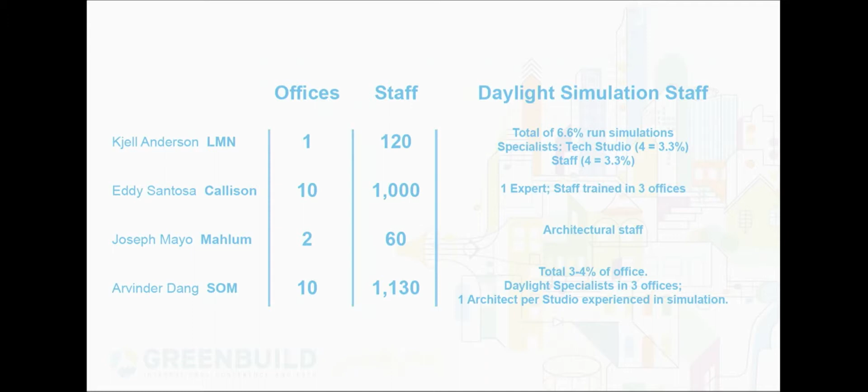So question, how many of you have daylight simulation programs within your firms? Unscientific, about half of you. How many of you actually click the buttons and run the simulations yourselves? So a few less, maybe 30%. That's really good. It's more than I expected.

So here's a quick snapshot of the 4 firms that we have. You've probably read it by now. We're trying to provide you a good cross-section of how architecture firms have used daylighting simulation within practice. So we have firms from 60 to over 1,000. Some of us use specialists, some of us just use generalists performing the simulations. But all of us use it to make decisions.

So my name is Kjell Anderson. I'm an architect at LMN Architects in Seattle. I'm also an author of Design Energy Simulation for Architects, which came out earlier this year. I've personally found it very freeing to do daylight and other types of simulations.

Instead of guessing that a space you're working on might have the right amount of light, not too little, not too much glare, you can actually play with it ahead of time and figure out exactly what, make sure that you're getting exactly what you want out of it. Play, as with children, leads to an intuitive understanding of daylight. So actually clicking the buttons helps that learning.

At LMN, we work on a variety of complex project types: performing arts, convention centers like we're in, higher ed, sports, and mixed use. A lot of our projects are urban, and so rules of thumb don't exactly apply to all of our projects. Since rules of thumb don't apply, simulation is even more important in order to vet kind of more unusual designs, shading, skylights, etc., that are common to complex building types.

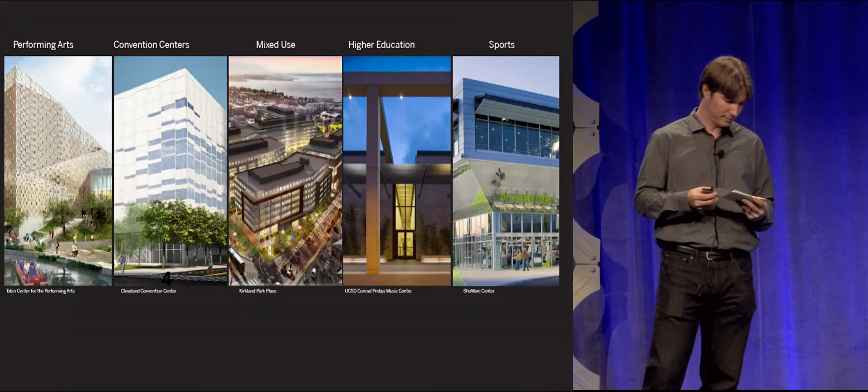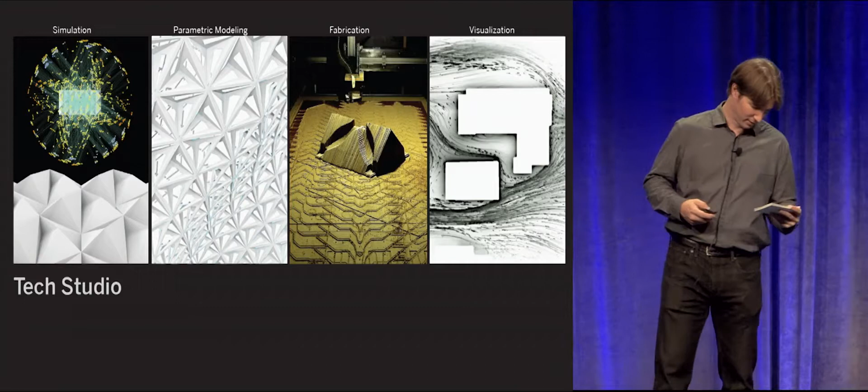With 120 plus employees, we have 4 people dedicated to technology. They're not IT people, they do other types of things. One of the things they do, they create complex parametric designs, and they work with costing exercises and fabricators to make sure that they're realized. They also write scripts to translate between Revit, Rhino, and other software. They operate our quadricopter, which is kind of cool. And they assist with daylight simulations and other types of simulations.

So as architects approach daylight simulation as an in-house entity, we have a lot more power than when consultants perform the daylight simulation. And the reason is we make the decisions, we make a lot of the decisions. If we come up with a better idea by doing a daylight simulation, we can implement it right away. We can talk to the design team 5 minutes later and have it as part of the design. So this is a powerful part of having it in-house.

So look around you. Isn't it ironic to talk about daylighting in a space that has no windows or skylights? Most convention centers were built and designed in an era where meeting planners wanted black boxes so you could do cool presentations like this. So I'll tell you a quick story about a convention center, one of the ones that we've gotten some daylight into. This is an exhibit hall in Spokane.

About 10 years ago, we noticed there was a gorgeous view of a river here and suggested putting in a window. The client said they didn't know if we should, since most exhibitors want dark spaces and we'd probably have to cover it up most of the time. What ended up happening when we talked to them a few years later was exhibitors wanted to be near it, and since attendees wanted to be near it too, exhibitors really, really wanted to be near it. So when we did an addition last year, we put in a full wall of glazing, and they loved it—or they will love it when it's done.

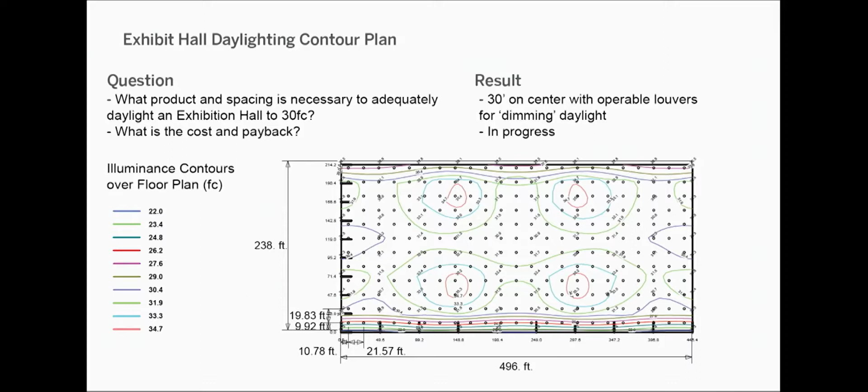So what we're working on for this project in Columbus, currently in DD, is a tubular skylight system over 100,000 square feet of an exhibit addition that would provide 30-foot candles and allow us to turn off the lights for the majority of the time. Even though we can black them out, we figure 70% of the time we'll be able to use the daylight and turn off a majority of the lighting systems.

So this is kind of the next evolution in that. This is a floor plan analysis showing contour lines that the manufacturer did for us. But since we do daylight analysis in-house, we were able to vet this and work with them so that we understand what these skylight devices are doing.

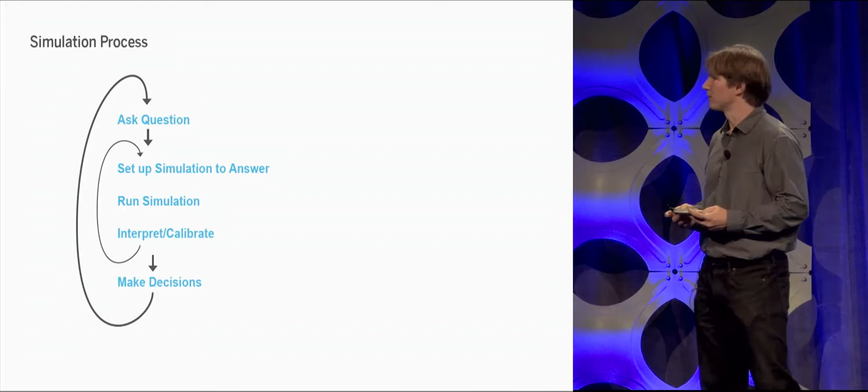As we design projects, we think about what constitutes success for each space, and it's very different for every space. Even within a school building, there might be 10 types of spaces that each have different daylighting requirements. So we think about the question—the question is the most important thing in my mind. Can you turn off or dim electric lights throughout the space? Is glare avoidance critical? What glare control measures are even in the budget? And are there minimum or maximum illuminance levels?

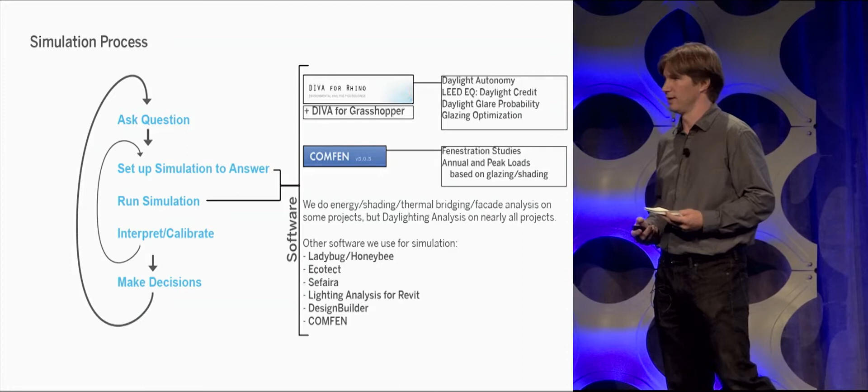Once you have the question, you can get into the software and infrastructure required for firms to start a daylighting program. We primarily use DIVA for daylighting currently. We're a Rhino and Revit-based firm, so Diva provides all the tools we need—it actually combines a lot of the tools we're already using into one package. We also use COMFEN, and Tech Studio is always testing new software and new techniques.

So I'm going to talk about a few case studies.

For this project, we had 8 hours to compare 4 massing schemes so we could present them to a client. It was a competition, and we didn't want to spend a lot of time on it, but we wanted to quantify performance to some degree.

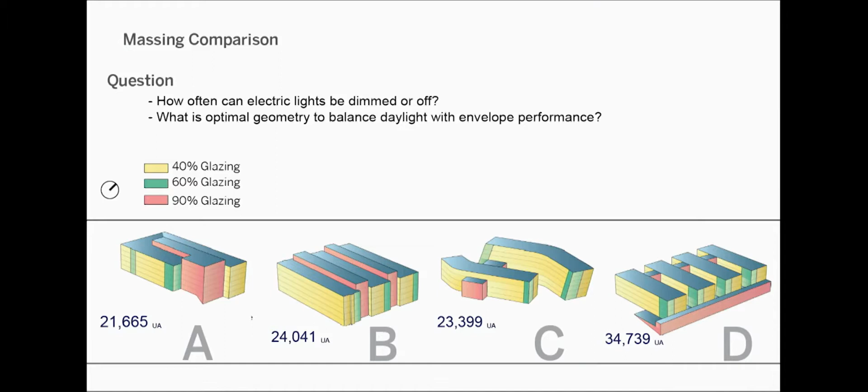So we chose 3 metrics to compare these office massing layouts. The colors refer to the glazing percentage on each facade, based on a really conceptual design. We chose a UA value, which is basically the U value of all assemblies multiplied by the area, then summed. That gives you a basic idea of what cooling and heating loads might be in the space, especially heating loads since it's near Seattle.

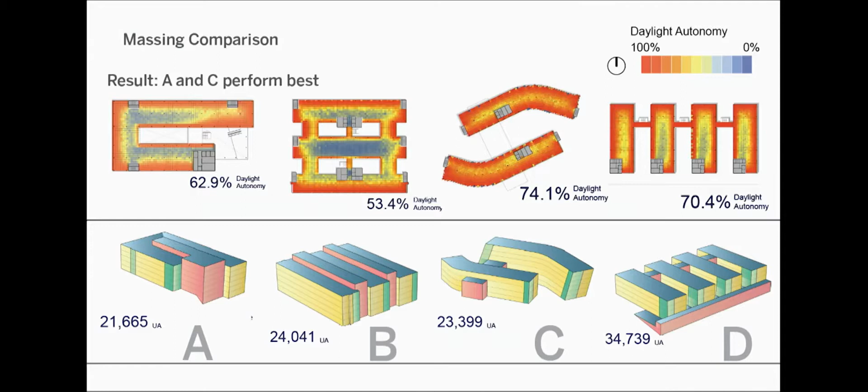We did peak load analysis using ComFen, and then we also did daylighting analysis using spatial daylight autonomy. Spatial daylight autonomy returns the percentage of each floor plate that is adequately daylit—in this case 25-foot candles—during the whole year. The first 2 metrics balance the third. If you just did daylighting, you'd probably end up with a fully glazed building, and spatial daylight autonomy would tell you that you've got a perfect building. But in fact, with 100% glazing, you're going to pay penalties in terms of heating and cooling that space. That's why we threw in the first 2 metrics to balance this daylighting.

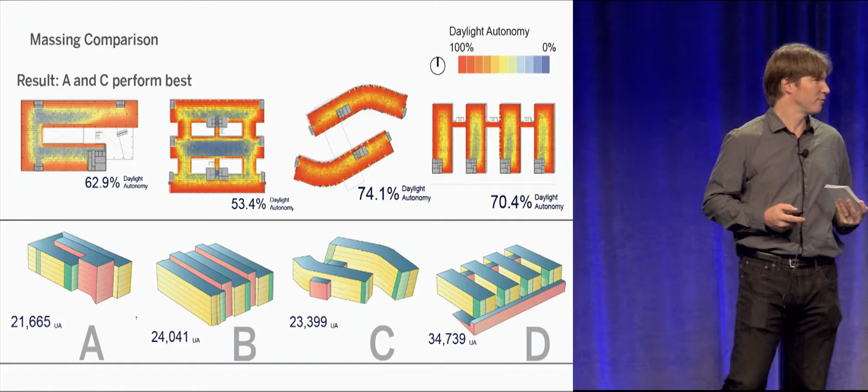So we expected option A to be the clear winner—we designed it to be such. We thought with a daylight atrium, we could get natural ventilation in there, and we're limiting the glazing on the entire rest of the building because of that. But when you look at the numbers, C actually has a better daylighting autonomy, and it has a fairly decent UA value, so we tried to reconcile this.

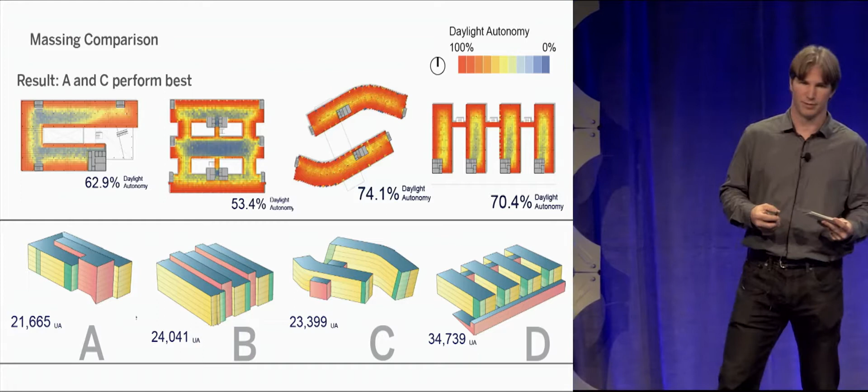The decision is complicated by the fact that the atrium in A is a semi-heated space, and in 4 hours you're not going to be able to model that and compare all the possibilities. But this study basically narrowed it down from 4 options to 2 options, and we were able to proceed from there—that was the only thing we asked of that particular study.

That one looked at illuminance at what's called the work plane, 30 inches above the ground. If you've done daylight simulation, you know that.

While the last example looked at those, most people perceive visual balance within a space based on vertical surfaces. You go into your favorite coffee shop, you've got one wall of glazing, and on the opposite wall you typically have a bright colored wall with electric light flooding on there so you have visual balance side to side. On this 4-story atrium, we have a single wall of glazing and we're trying to do approximately the same thing. The question we asked was how much daylight do we need to provide to light up the balcony rails on the opposite side so we don't have too much visual contrast between them.

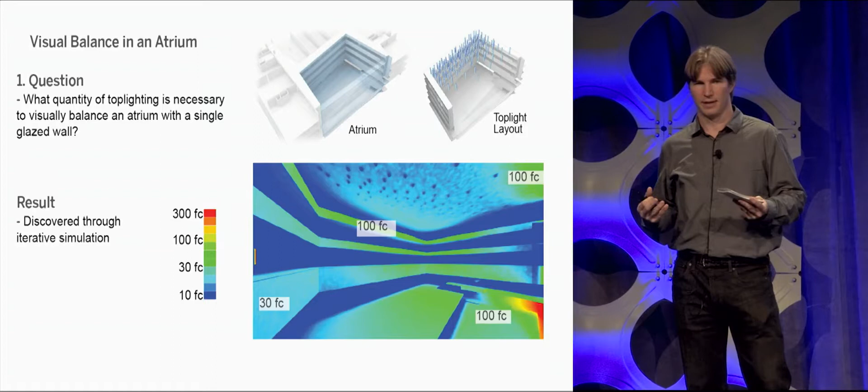30-to-1 is a ratio that can be used to approximate visual balance within a space. So if it's about 1,000-foot candles just inside the window, and about 30 to 50-foot candles of illuminance on the balcony railings, we would achieve success, and that's about what we did. So we didn't have a quantifiable answer, we had an answer where we achieved a certain amount of visual balance that we were looking for.

It's important to calibrate any of your daylighting simulations to something you understand and something you know. When we did an office remodel last year, we had the amazing opportunity to go out with light meters every day in our space and calibrate our simulations to exactly match reality. That's why I'm covering this particular space.

We moved in afterwards, and of course we've done thermal comfort studies and visual studies. We were actually commissioning the blind system ourselves so it goes up and down at the exact right times. The first study we looked at is a light shelf that you see here in this section.

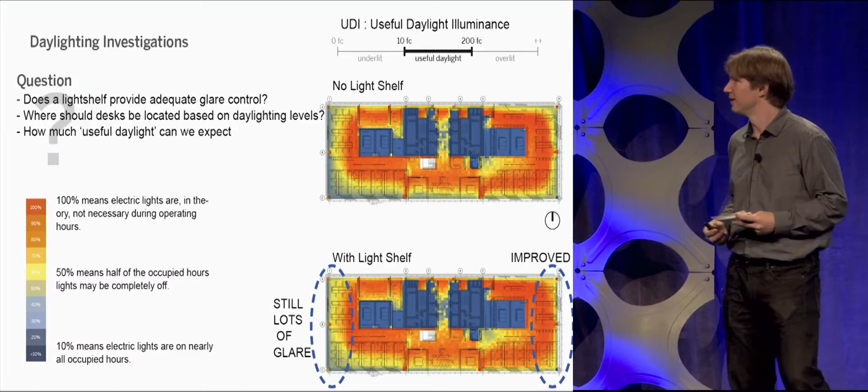We used Diva on this one, and you can see we have the image on the top and the image on the bottom. Image on the top, no light shelf. We have the image on the bottom. This uses a metric called useful daylight illuminance. UDI is what they call a Goldilocks metric - not too little, not too much, it's just right. So we're looking for 10-foot candles to about 200-foot candles here.

What we can see is with the light shelf, it doesn't really improve the areas around the perimeter where we have overlighting and potentially glare. We can look at this a different way that shows it even better. This is UDI looking at the upper graphic as too much light, and the lower graphic as underlit areas. We have very few underlit areas, and in fact the entire perimeter is overlit.

So one thing we did from this was move all the desks away from the exterior walls, or exterior windows, by 4 feet, and that really helped.

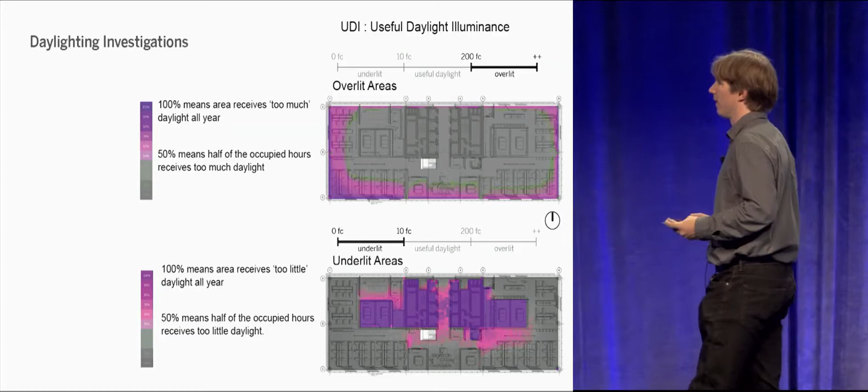Another thing we did with this same metric was essentially move the desks around so they achieve daylight. We're not looking for daylight in the abstract, we're looking for daylight at the work surfaces. So by moving the desks around, we were able to increase the daylight autonomy at the work surfaces, which is where we want it. And we did that in Photoshop, which was pretty cool.

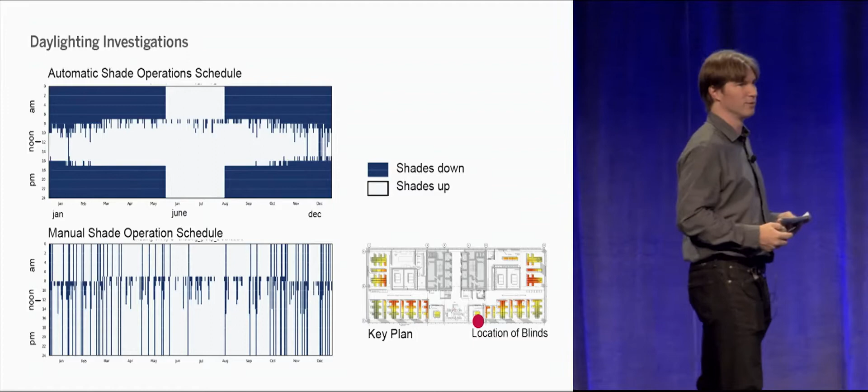But one thing we didn't cover in those was blinds. If you've ever worked on trying to extract daylight energy savings from dimming your systems, one of the big issues is whether you have automatic or manual blinds. Manual blinds tend to be put down and stay down for days or even weeks, so you get no daylight harvesting during those periods of time.

This is a Diva simulation using DaySim that shows blind schedules with automatic operations on the top and manual operations on the bottom. There's a fairly significant difference in terms of the amount of energy savings you could harvest out of lighting systems. Based on these, we've saved about 50% of the energy use from the previous lighting system.

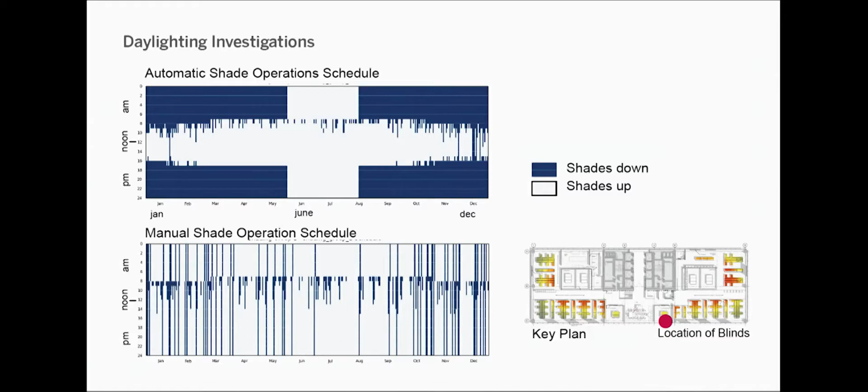So for my last case study, museums - this is going to be a museum. It was an armory, now a museum. It's on South Lake Union in Seattle.

Museums have a love-hate relationship with daylight. They love the fact that it renders everything well, but they hate the fact that it deteriorates their artifacts. They often exclude it so they can preserve their collections.

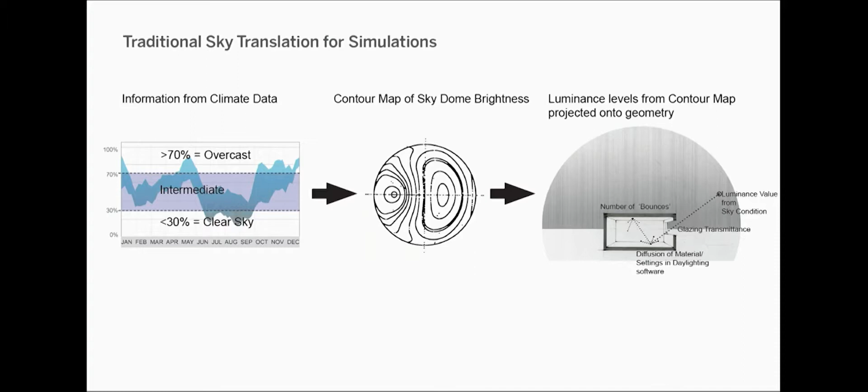Most simulation software takes data from the weather file to create a luminance map, the middle image, of the sky dome, and then that essentially projects light onto your geometry, which creates daylight simulations. Reverse ray tracing means it's in the opposite direction, but essentially this is what happens.

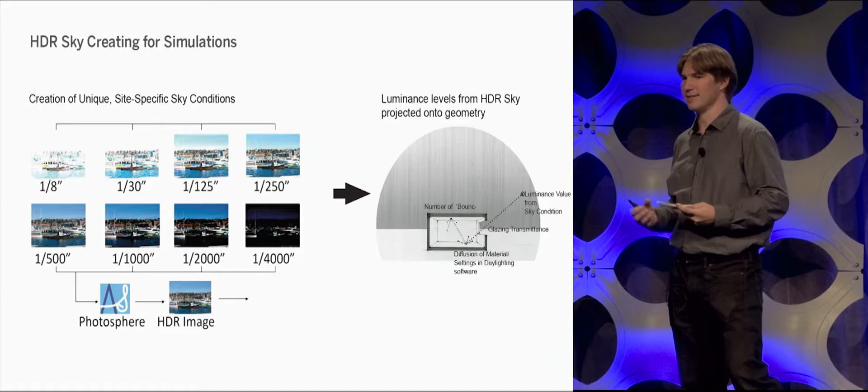What we did for this one, we wanted to be able to take into account the context, the trees, any reflections from the lake, etc. So what we did is we take HDR photographs of the entire sky dome. HDR photographs are luminance images, so we're able to composite these into a luminance map of the sky that essentially replicated the middle image here.

Except it was very specific to our site, the context, the trees, the water, everything around, and we're able to use that as a luminance map for our daylight simulations. This allowed us to do not only the bottom left image, which is a typical luminance type study where you look for glare within a space, but also photorealistic, photometrically accurate renderings, which are the ones on the right. Those aren't Photoshop images. Those are actual images using the HDR sky that we created.

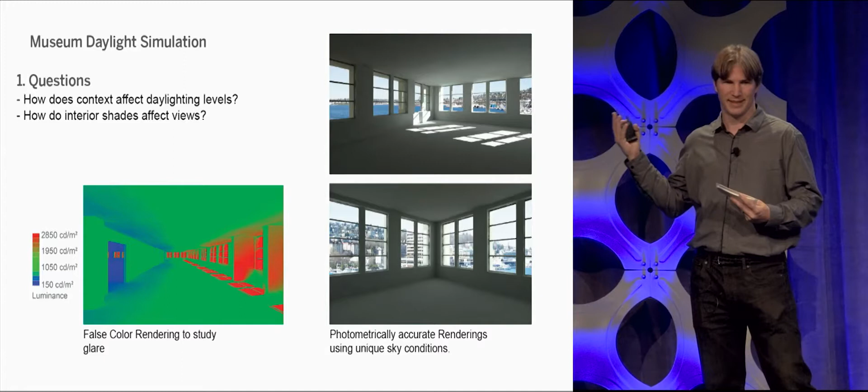Normally, when you look out of a rendering, you see the sky, the CIE sky that you use to do the rendering. But in this case, we're actually seeing the HDR images that are projecting light into this space.

One of the advantages of this is we could then test out blind systems and see, based on the relative luminance levels, what type of blind system would provide the right balance between preserving artifacts and allowing views to the Space Needle and the lake.

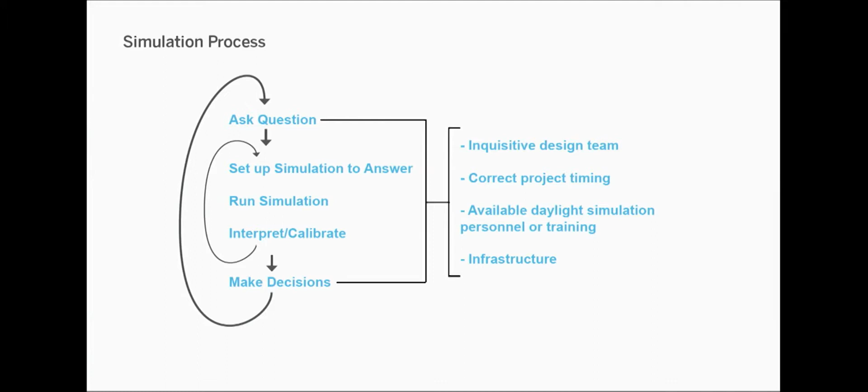Back to the simulation process. One of the ways we've found to be successful with getting our tech studio and our simulation into projects is by setting up sessions at the beginning of every design phase where we brainstorm questions with the project team that we can answer using simulation. Sometimes they generate questions on their own, and sometimes they need to be prompted, which is why we set those up. Our biggest challenge is usually getting the right person to run the right simulation at the right time.

If you're a week early, design has changed and your results are no longer valid. If you are a week late in getting the right person to the right project, the decision's already been made and there's no going back.

I'd also like to mention our blog. Later today is going to be a posting. We've tested several daylighting softwares over the last several months, and we are about to post that later today based on comparing them for usability as well as comparative accuracy.

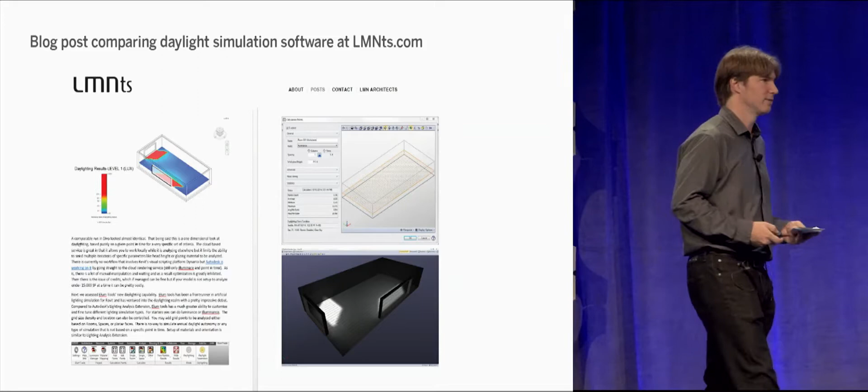After Jill made a good presentation about daylight at LMN, I would like to share what we do at Callison.

We are a 1,000-person architecture firm, and we do different types of buildings, from specialty retail to workplace environments. We have 10 different offices around the world, from Seattle to Shanghai in China. In our performance simulation team, we have people in Seattle, Mexico City, and Shanghai.

We consist of 14 people with one specialist, which is me, and we train people from architecture studio to do energy simulation and daylight simulation. This is one of the training sessions that we have.

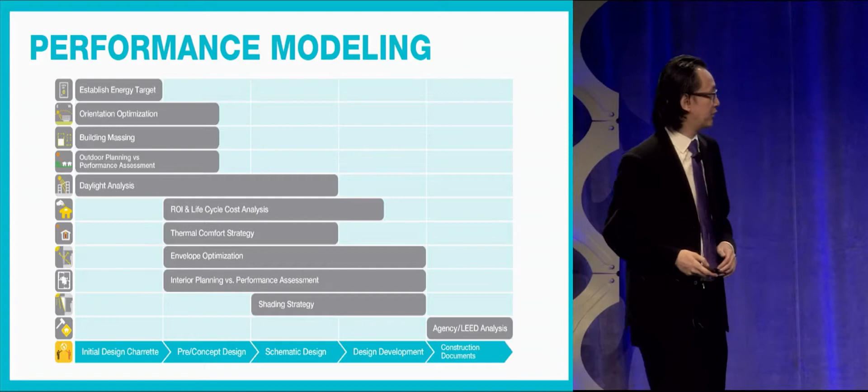In terms of daylight simulation, we put it in a bigger context of performance modeling. This is our typical approach that we want to implement ideally in all projects. As you can see, it started with establishing energy targets to delivering energy modeling for LEED compliance. If you see the fifth row, it's actually a daylight analysis. Ideally, we would like to do it in early design, at least until the SD stage, so you have the opportunity to play with your massing and the shape of your building.

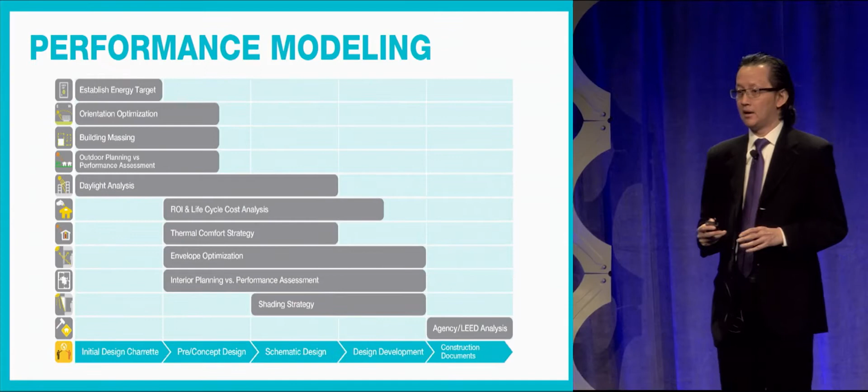After we talk about the background in our company and how we set up the group, I would like to share two interesting case studies. Both are interesting because we couple energy performance and daylight performance in the space. The first case study is a retail project in Dubai.

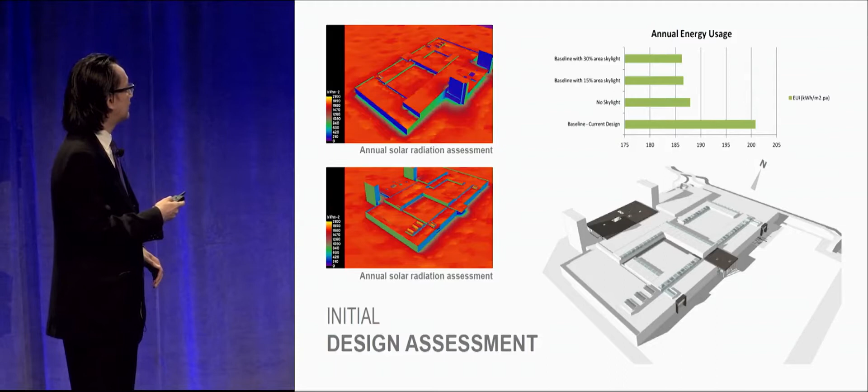This is our initial design sketch from our design team. Our goal is to provide daylight in the corridor space and the food court area. We provide a good daylight design scheme by putting the skylight on the east side and the north side of the corridor. If you follow the rule of thumb, it's the best design.

However, we test with our energy simulation. Our current design actually performs above 200 kilowatt hour per square meter. We also experimented with a different scheme by eliminating all the skylight, putting only 15% of the area as skylight, and 30%. We can see our initial design doesn't perform really well. The other scheme performs below 190 kilowatt hour per square meter.

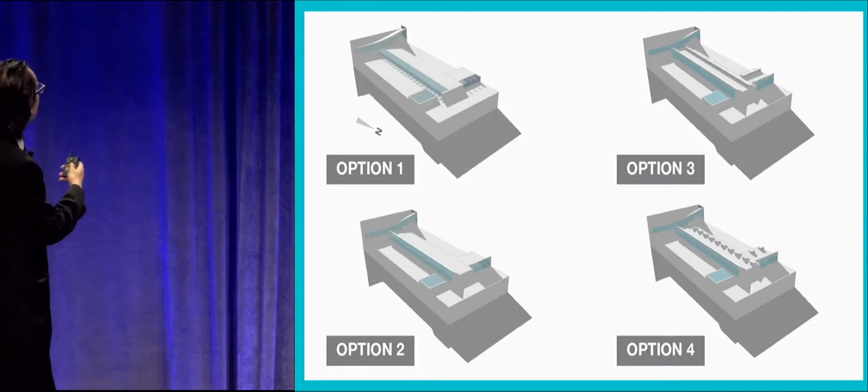After we assess the daylight energy, we want to see how the daylight is in the space, especially in the corridor. We played with 4 different options in the beginning. Option 1 is actually our initial design sketch. In options 2, 3, and 4, we introduced different types of shading devices and light monitors.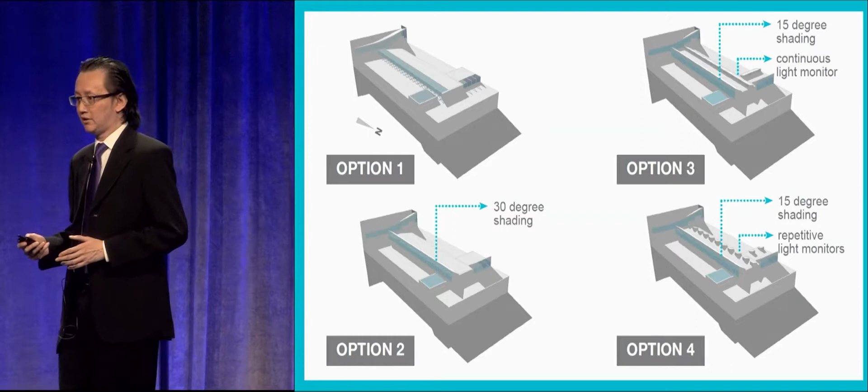For option 3, we have a 15-degree shading device and continuous light monitors. We test our daylight simulation at June 21st, 1 o'clock, because it's one of the peak loads in the building. We use a standard of 200 to 500 lux. 200 lux is the minimum IES illuminance recommendation for the corridor space in a retail building.

So this is the result of our simulation. The first image shows the rendering, or the luminance level. The second column shows the illuminance level. Our target is shown around the blue color, which is around 200 to 500 lux. You can see our initial design shows a problem with daylight as well — we achieved more than 30,000 lux in the space. So you can see the correlation between bad building and the energy performance and the daylight.

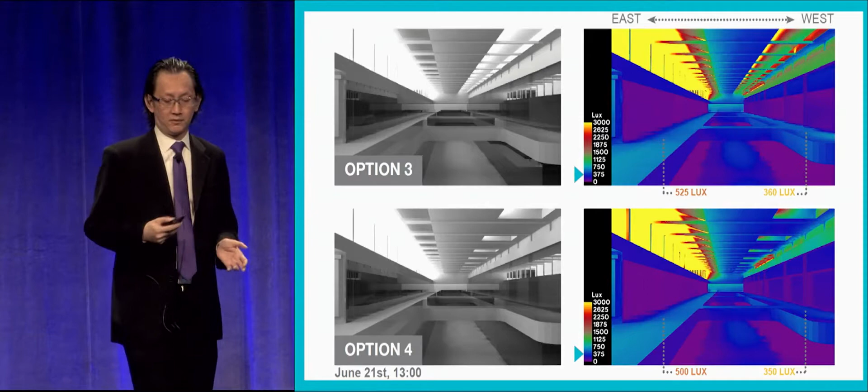In option 2, it's getting closer to our target — it's 750 and 300 lux. This is option 3 and 4, getting better and better in terms of the illuminance level we want to achieve. After several iterations, we chose this option with a clerestory window and a skylight with a diffuse type of glass. You can see the illuminance level — we can achieve the target around 300 and 400 lux.

After seeing the evolution of illuminance, you can see when starting we have a really high illuminance level, but in the end we can achieve the targeted illuminance, which is around 200 to 500 lux.

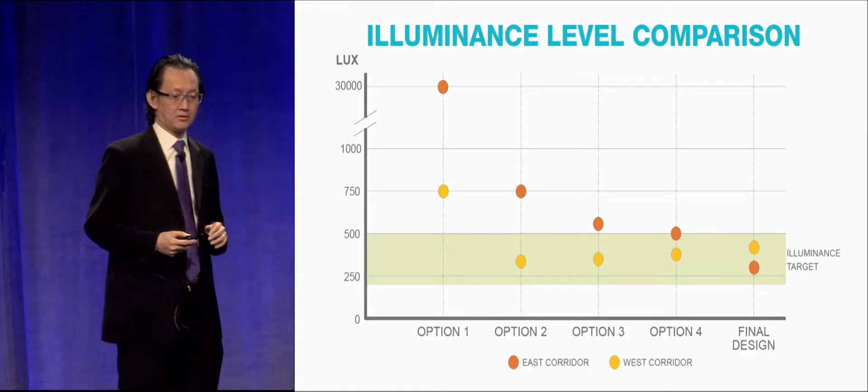We also use this approach in another space, in the food court area. I will just go briefly through the food court area. This is our initial design in comparison with our improved design. In our initial design we have 2,000 lux, and in our improved design we have 500 lux. What did we do to make it better?

There are 3 strategies that we changed in the building. The glass facing the south part, we changed it by making an additional perforated metal on the outside and a fritted glass on the inside. We also introduced a diffuse glass in the small skylight in the ceiling.

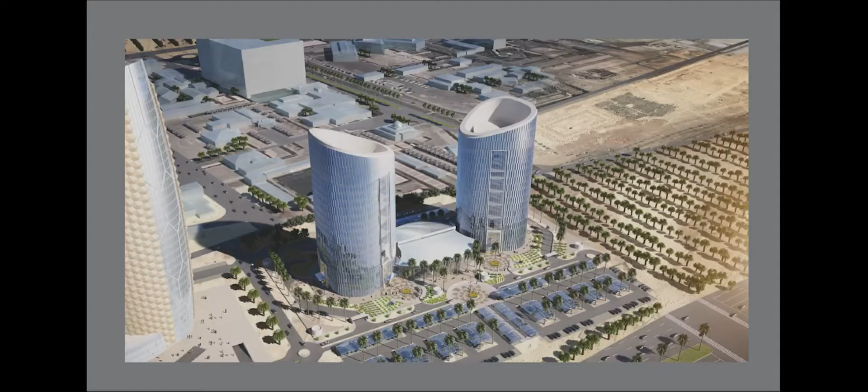After talking about the retail space in Dubai, I would like to share a project in Abu Dhabi. It's a triangle-shaped office tower. Here, our goal is to optimize the facade using energy and daylight simulation to make sure we have a low energy building and good performance in terms of daylight.

Here we use energy simulation as our assessment tool. Probably most of you are familiar with EQuest. EQuest is mostly used by people for LEED compliance or code compliance purposes.

In this case, we're comparing 4 different schemes. Our initial design is a sleek tower building without any shading device. You can see the performance of EUI showing 100.3, and we can also see the performance of daylight from how many percentage of electrical lighting that we save. In this scheme, we have savings of 48%.

We introduced shading B and D in option 1, which is a vertical shading and a grid shading device. This is each shading that we apply on the facade. You can see the energy performance is dropping, which is getting better, but we compromise a little in daylight performance. The more energy saving from daylight — from the electrical lighting — means the more daylight we introduce to the space. We also tested the perforated metal by adding a shell to the building.

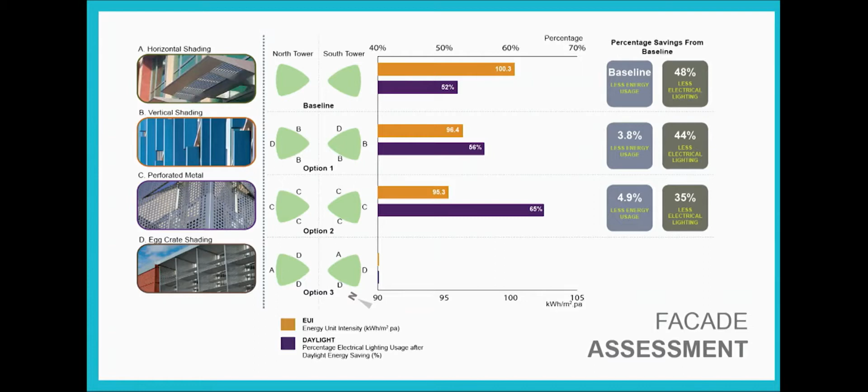You can see we compromise a lot in the performance of daylight, although in the energy performance we're getting better. We only introduce daylight and saving the energy around 35%. Our preferred option is actually the last one, which is we balance both. In terms of energy, we're not the best one, but we also still get a lot of daylight and view for the building.

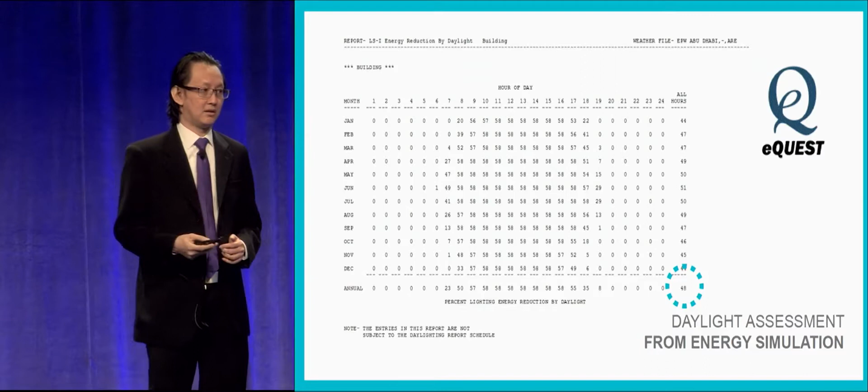In the eQuest, our typical result is from LS-I. So if you don't have a daylight simulation and you have a LEED project, definitely have an energy modeler. You can ask your energy model to test the daylight also, the performance in the building in each zone area. Here it's showing the electrical lighting usage saving in a year, showing a month and also showing the every hour saving.

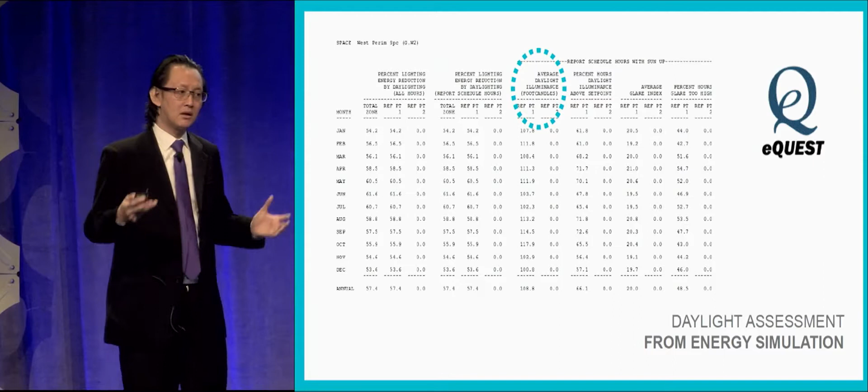You can also learn about the illuminance level in space. Every zoning, they will have a report that you can pull out and see the illuminance level in the building. So it's very handy if you don't have a daylight consultant in your building. This is probably not the most accurate compared to radiosity or ray trace simulation, but it's good enough to drive your design.

To make a decision what type of design that's better for your building. In conclusion, we can see the daylight simulation is no longer only for LEED compliance, but it's also for making a better design, high-performance building, and comfortable space. We also see the rule of thumb is no longer valid. It's no longer sufficient to address the needs of sustainable design. Thank you, and I will hand out to Joe.

Thanks, Eddie. Hi, my name is Joe Mayo. I work for Mahlum, an architecture firm with about 60 employees and 2 offices, one in Seattle and one in Portland, Oregon. I have to say that I'm not a daylighting expert, and no one in our office is a daylighting expert. With about 30 employees in each office, we don't really have the amount of projects or the resources to devote a full-time staff member to daylighting.

But despite this fact, I think we've been able to achieve a very high level of success in daylight design without having any bona fide experts on staff. So what I wanted to talk to you today about is how we've been able to achieve this, a little bit of history of the firm, where we started, where we moved to, and how digital simulation tools have helped us in the process.

A milestone project for us was the Seminar 2 building at the Evergreen State College, which opened in 2004. The project was important for us because it marked the first collaboration we had with the IDL, the Integrated Design Lab, which is a research group at the University of Washington that specializes in energy analysis and daylight simulation. By collaborating with the IDL, we were able to integrate a variety of daylight strategies across what we term the building's 5 facades. And in doing so, it also achieved the first LEED Gold rating for an academic building in Washington State.

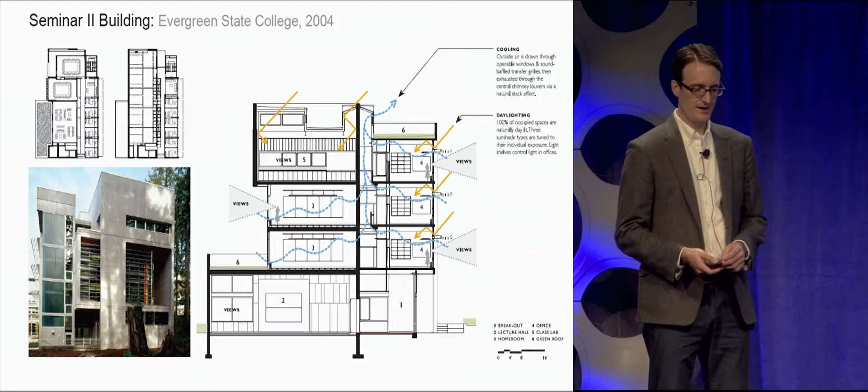It also created an atmosphere in the office where we were constantly just talking about daylighting and discussing what good daylighting meant. Over the years, we worked with the IDL many times on many different projects, a lot of them K-12 schools, where we were really trying to do daylighting at no added cost. So it was really a great pressure. And also by doing this, I think we established what I would call a really intuitive understanding of good daylighting, how to do good daylighting.

So a few years ago, we decided that rather than relying so much on outside experts, we thought we could be more nimble in the design process by actually integrating digital simulation tools into our workflow. So we started out this process by actually hiring a recent architectural grad from the University of Washington who had worked in the Integrated Design Lab for a few years during college.

He came to our office and helped set up really early on the tools we were using, trained some of the people in our office, and then that moved outward. Many other people in each office have been trained since then. He also served as a person to talk to validate our results, which can sometimes be the most challenging part.

So a few of the workflows we've looked at in our office that I'll discuss today are using Ecotect, using COMFEN, using Revit, daylight illuminance in the cloud, and also touching base on physical modeling and using the integrated design lab.

So this is a middle school in Issaquah, Washington. It's currently in the design phase, just started construction documents. It's a different building for us because tight site constraints put us into a difficult situation where we had to orient the building with classrooms facing east and west, which is a different design problem for us since we typically orient classrooms facing north and south.

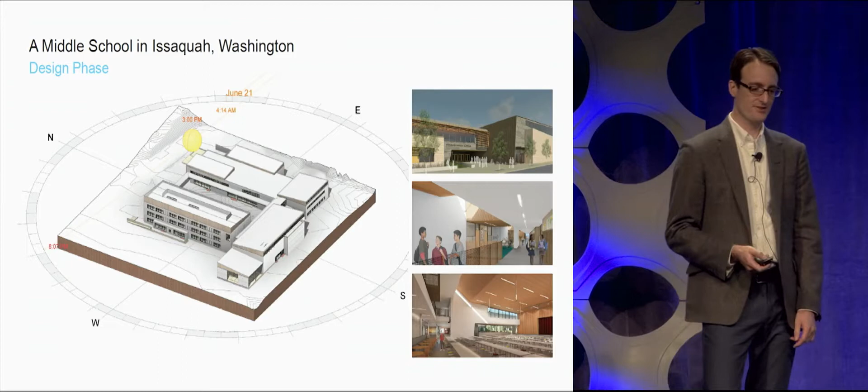Using digital simulation tools really helped us quantify the problem and come up with a good solution. So here we started out using Ecotect. Our strategy is we're doing all our architectural modeling and documentation in Revit, but exporting a Revit model into Ecotect doesn't really work, so we're remodeling geometry in SketchUp, exporting that into Ecotect, applying daylighting glazing materials in Ecotect, and then using the Radiance plugin to do the analysis.

So it's a number of steps, and it's definitely not a seamless process, and there's many problems that can happen along the way, but once you get good at it, I think it's a very useful tool.

As Chell was saying, we always want to start out with asking a question. The question here was creating daylight equity. Because of zoning height limits, the building could only be 30 feet tall, and programmatic elements on the ground floor were really compressing the upper level classrooms. So the upper level classrooms had less window wall to work with, and we wanted to ask: how can we create a level of equity between the upper and lower level classrooms?

To do this, we started out doing a variety of really quick comparative studies. Using SketchUp and Ecotect, you can do the comparative models and simulations really fast. You can do all of these in probably a day.

Our first look was adding clerestory windows to the upper level classrooms to drive daylight deeper. Adding skylights is a very simple design move to create a more even distribution of light across the space. And then also moving a bit into detailing, seeing how far we could push the window wall to the underside of structure to get every possible inch out of the window wall we could.

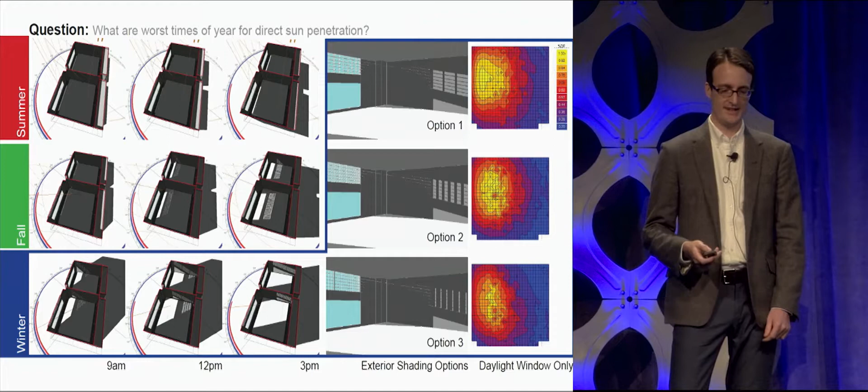I'm not going to spend too much time on that because we had a value engineering session midway through design development that eliminated all of our exterior shading, which I'm sure many of you are familiar with. At that point, we decided that since we were only going to be able to use interior shading devices, using a different software package would actually make us more nimble in the amount of iterative studies we could do.

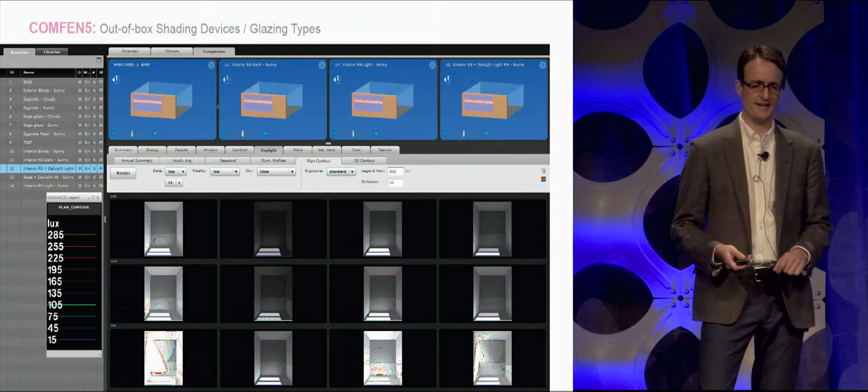So we switched to COMFEN5, which is a program developed by Lawrence Berkeley National Labs. And it has a lot of really great out-of-the-box interior shading devices, like roller shades where you can choose a different color and the amount of openness to create those materials. In Ecotect, you have to have your own material definition for those, which is a little bit out of the expertise of our office, so this actually allowed us to do the simulations we wanted. It can also model Venetian louver blinds at different angles, and you can set them to be automated. So it just has a lot of great tools.

So here what we're looking at is a baseline option. This is a plan looking at a typical classroom, comparing dark roller shades on both the view and daylight window, a light roller shade on both windows, or a combination of a dark roller shade on the view window and a light roller shade on the daylight window. From this analysis, it looked like the light roller shade was really providing the best even distribution and amount of daylighting in the classroom, so this seemed like an interesting choice for us.

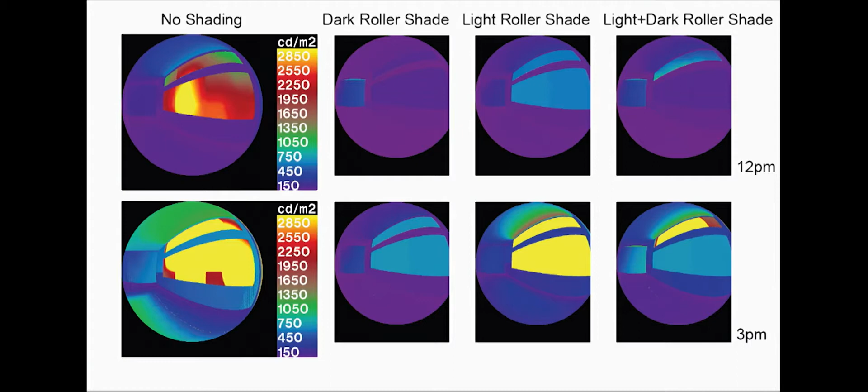COMFEN5 is also able to analyze glare, so the next step was to look at how a light roller shade was affecting glare. Looking at those same options, as we'd expect, the dark roller shade pretty much eliminates glare, but the light roller shade toward the end of the day actually produced a pretty glary environment. So the combination of a light roller shade only on the daylight window helped mitigate the majority of glare in the classroom while still providing a good amount of daylight. This helped us quantify the situation, and this is the direction we moved on to.

We've certainly made some changes along the way, but without digital simulation tools, I don't think we could have come to this conclusion. So really quickly, I also want to touch on an elementary school in Mercer Island, which is also in the design phase, just starting construction documents.

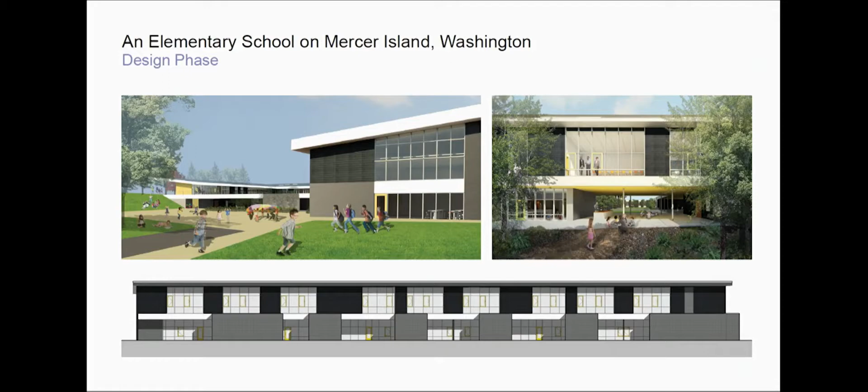Here, since we're doing all of our modeling in Revit, it really makes sense if we can do daylight analysis in the same program that we're doing our modeling, so we don't have to spend time remodeling, exporting, and applying different materials. So Revit has proved useful for that.

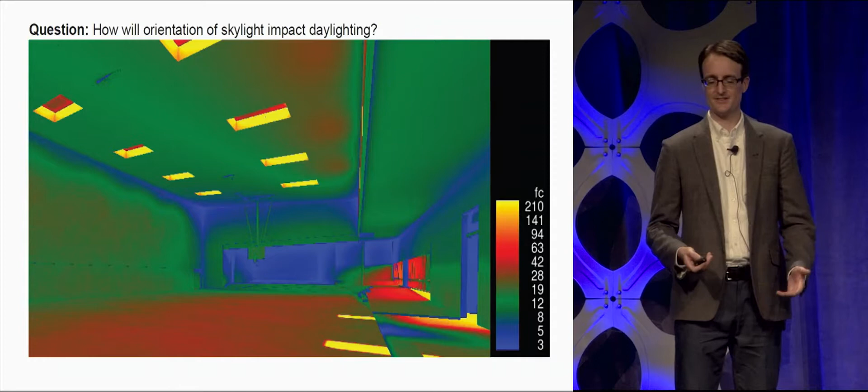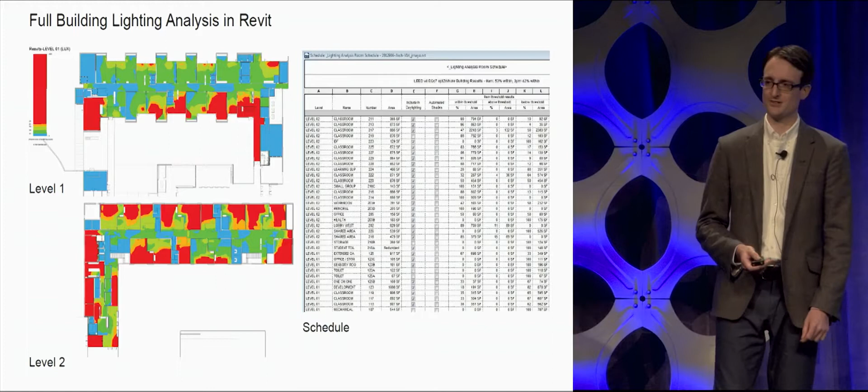Revit is also able to do full building daylight analysis with their plugin. It's kind of expensive in terms of cloud credits, but I think it's a pretty useful tool, and it can also export schedules, which is really nice — you can do your LEED documentation right inside of Revit. Hopefully at the end I can touch on a bit more of what I think are the pros and cons of each of these software packages, but right now I'm going to hand it off to Arvinder.

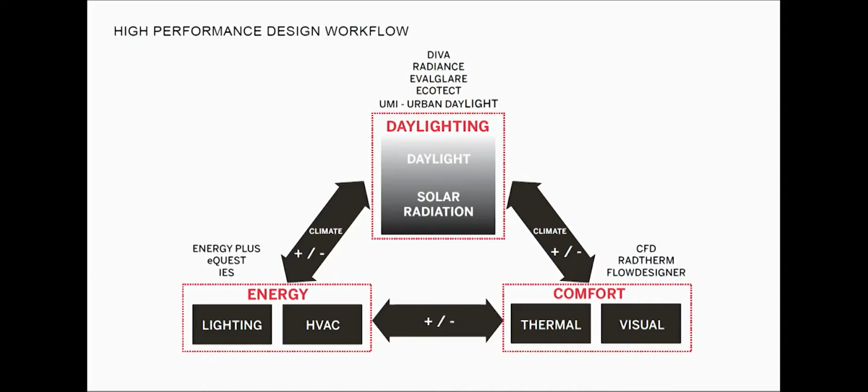Too much daylight, or a lot of direct radiation, as you saw in some of the case studies presented, could lead to really high HVAC loads, but more importantly really impact the comfort perceived by occupants. On the other hand, really good diffuse lighting can reduce electrical energy consumption overall while enhancing comfort.

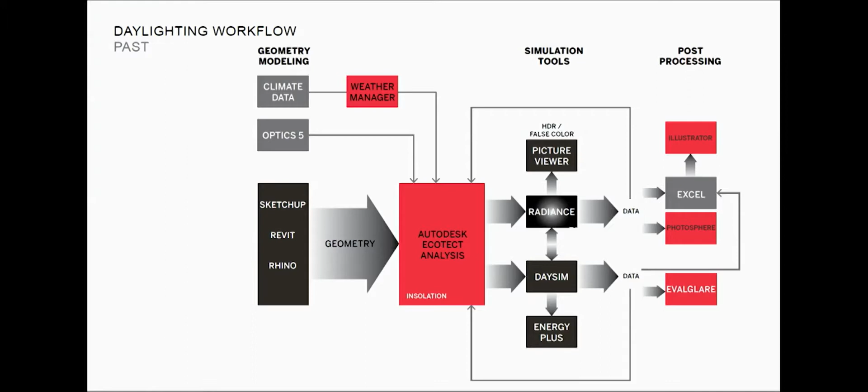So initially our process was very similar to what Joe presented. We used to use Ecotect. Models were created, sometimes the input to the geometry was really complicated, and it really slowed our process. Soon we realized we were using the Radiance engine always to do our analysis, but it was becoming really prohibitive in terms of time, especially related to curved geometries.

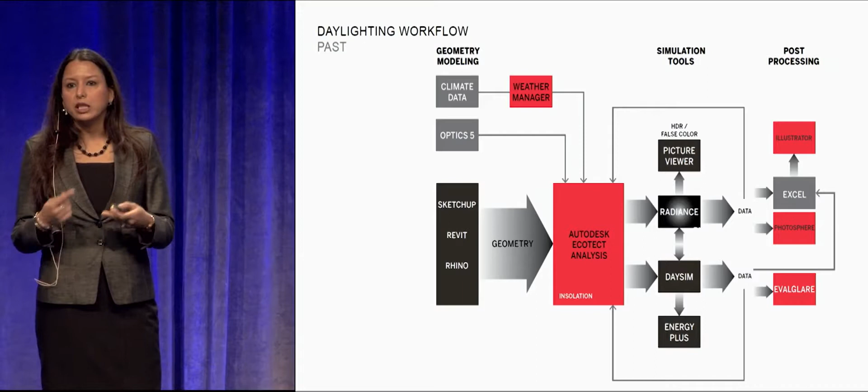We do a lot of super-tall high-rise towers, and not always is our geometry rectilinear—floors change, lots of curved surfaces—and often we realized we couldn't keep up with the design iterations that the architects were making.

A lot of innovative tools have emerged in the last few years. Most of these are actually plugins to Rhino—there's Grasshopper, which allows for a lot of parametric analysis. Diva is a tool we've been using a lot. We really like it because it allows us to look at annual daylight as opposed to just an instance in time.

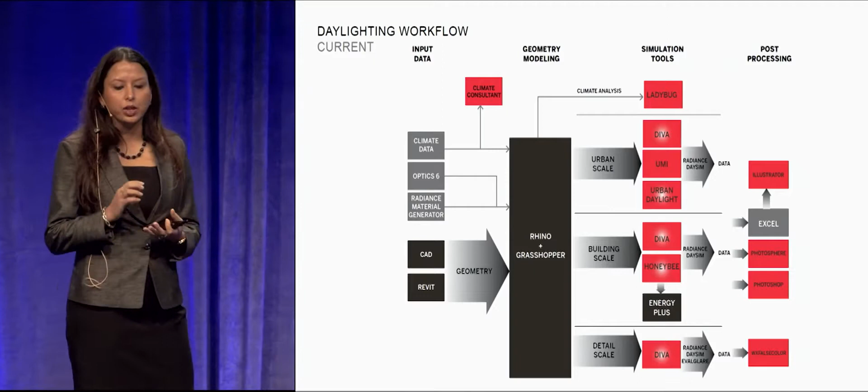Ladybug, Urban Daylight—all these are plugins for Rhino. A lot of our geometry is created in Rhino, or can be imported into it. Depending on whether we want urban analysis, we'd use Urban Daylight and Diva; for a more specific building-scale analysis, we'd use Diva and Evalglare to do some glare assessments. Now we're trying to test Honeybee.

So not going further into tools, but to share with you some examples on an urban scale: this is actually a project in Jakarta that we were working on. Early on, when we were trying to inform the design framework, we wanted to look at what the blocks should be like, what should be the massing, and how that really determines the radiation levels that fall both on the facades and on the ground plane.

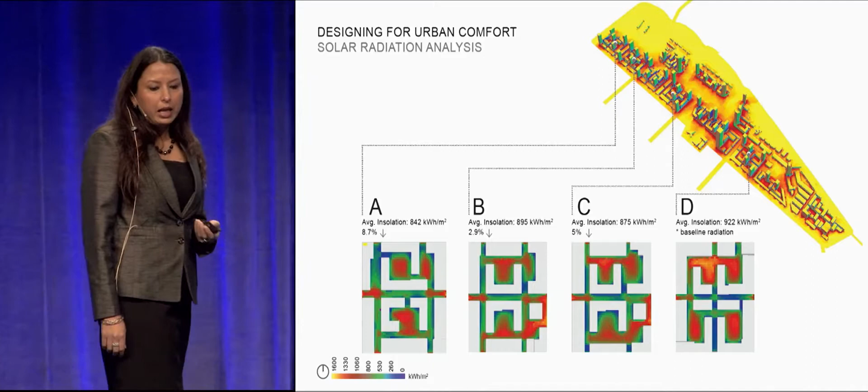We looked at different block typologies, got into detail, and looked specifically at ground-level radiation and facade-level radiation. We really quickly realized that our design wasn't performing—the urban comfort would not be there in these blocks, because there's so much radiation that the outdoor realm would make people uncomfortable. So what is an alternate way we could look at this? We investigated alternate building typologies, or alternate building massing scenarios.

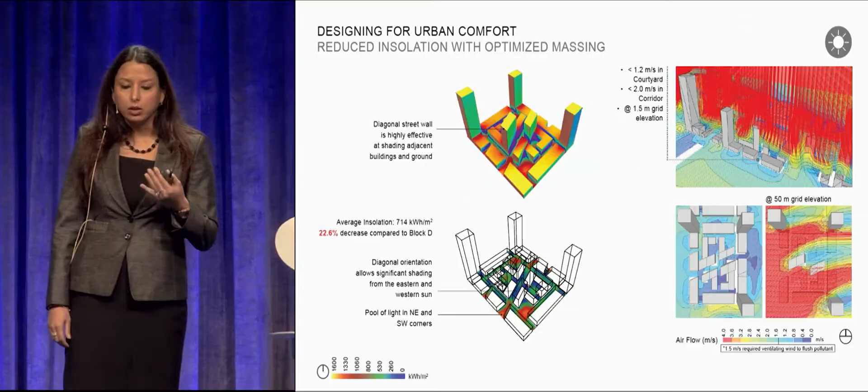We introduced a diagonal street here, and we also varied the podium heights across the site. We realized that because we're near the equator and the sun is in the northern hemisphere, by varying the heights of the podium level buildings and adding a few towers on the north side, we could shade the urban realm more and make the space comfortable, since people would be walking in the shade.

Simultaneously, we also did airflow studies and looked at wind velocities at human height to see how that impacted comfort.

As I said, lots of new tools have emerged, and we can now do parametric analysis that extends to informing our street framework, like what the width of our streets should be in an urban design project. Here we looked at urban daylight in conjunction with Grasshopper, and tested multiple street width options to see how that impacted daylight autonomy as well as radiation levels on the facade.

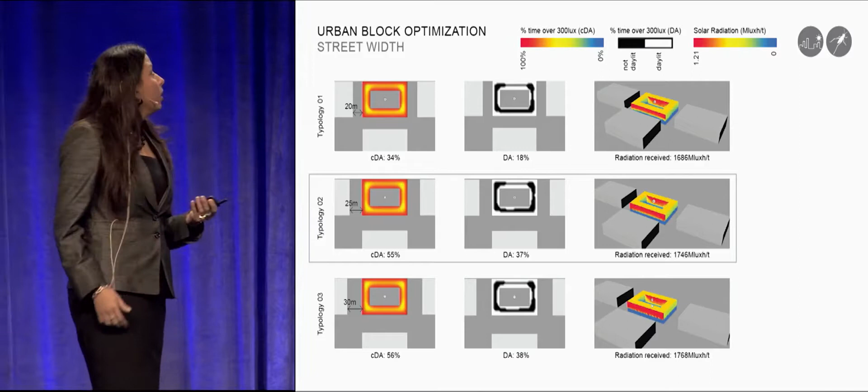We tested 3 options: a 20-meter, a 25-meter, and a 30-meter street width. Moving from 20 meters to 25 meters, we were able to increase daylight levels in the building from 34% to about 55%. But any further increase in street width didn't really help—the impact was marginal. So that was the optimal size we determined.

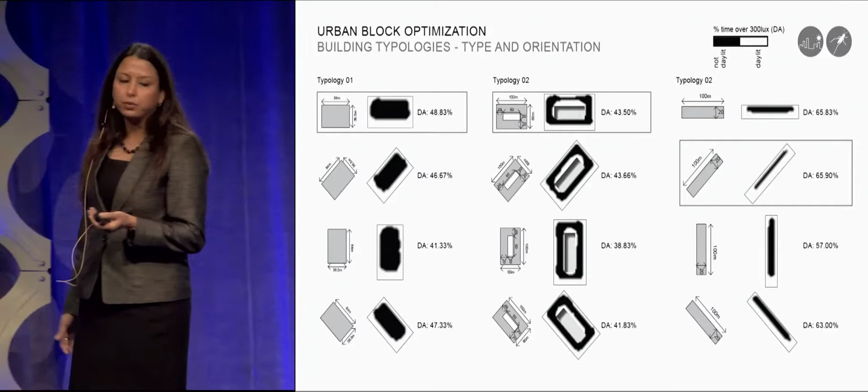This analysis could be further extended to test different building typologies, orientation of the building, whether you introduce a courtyard or not, and what the aspect ratio should be, helping inform large-scale master plans or urban frameworks. We extended this even to determine the optimal size of a courtyard in terms of aspect ratio.

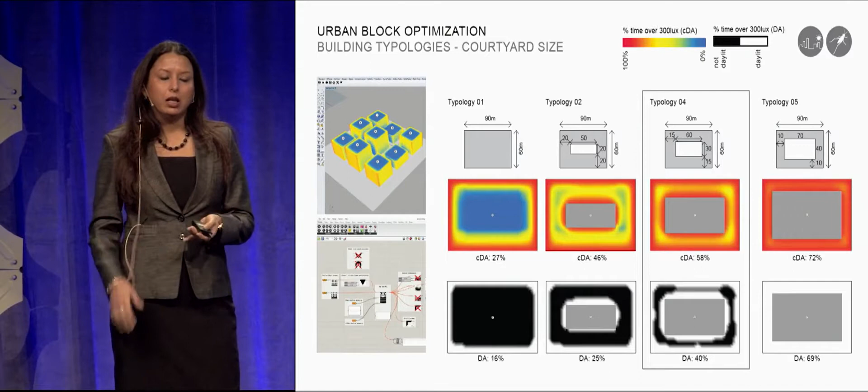A lot of this analysis was actually done fairly quickly—less than a day for all of it. It's the use of these parametric tools, and the fact that the geometry can be created really fast as a plug-in into the same tool we're using for architectural geometry, that makes the process fast.

I'll walk you through the entire process. Really early on in concept, we were brought in and they said they had different massing scenarios to look at: a one-story larger super lab space, a two-story space with a larger super lab attached to the existing building, and a third standalone two-story option with a smaller, different-scale super lab space.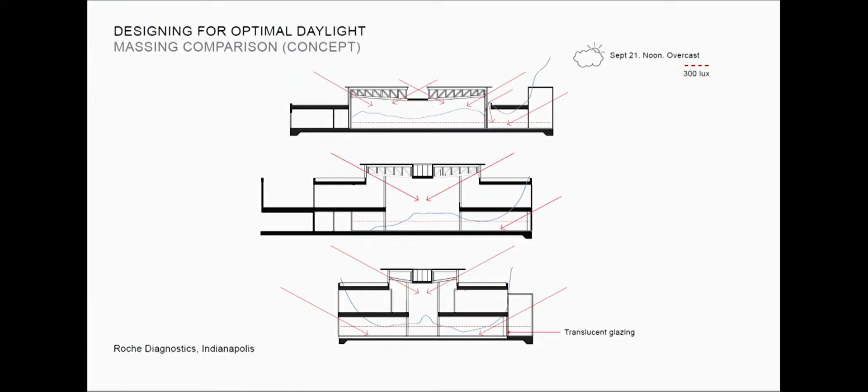We ran some quick point-in-time daylight analysis, then mapped the daylighting profile across the section to determine the quality of light you'd get within the space—the illuminance levels. Very quickly we assessed that our third option, the standalone one, provided much more uniform light, close to the levels we needed, shown by the red dotted line, and we got light in more spaces.

As we moved into schematic design, we started testing different options for the skylight over the Superlab space—7 different scenarios. Our architect started with a really large, clear skylight. We knew this wouldn't perform well, but we wanted to test it to prove it. Then we introduced a translucent skylight, a super large one, and tried modeling multiple skylights as an alternate. We also looked at clerestory and roof monitor options.

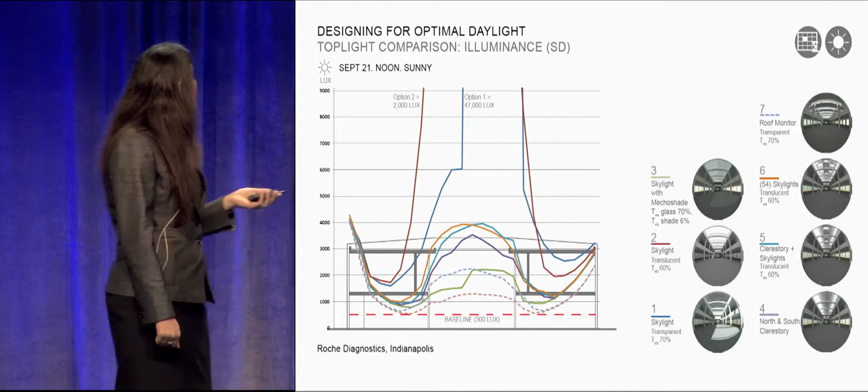The graph on the left shows illuminance readings mapped across the section of the Roche building. The first two options, the red and blue lines, are really off the charts. The red dotted line at the bottom represents the 300 lux level needed within the space.

Really early on, we were able to rule out that you can't do such a big, large volume with that big a skylight. Simultaneously, we also tested for glare as well as did some false color renderings for the space to look at the quality of light.

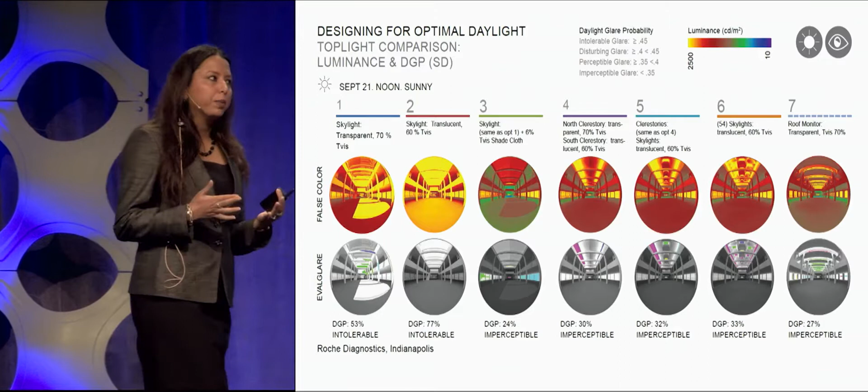Here we were testing using Evalglare, an index called daylight glare probability, where if you establish a view angle, you can determine how much glare an occupant would perceive from that viewpoint. The first two options there had intolerable or really high glare values, and the roof monitor option was the one we proceeded with.

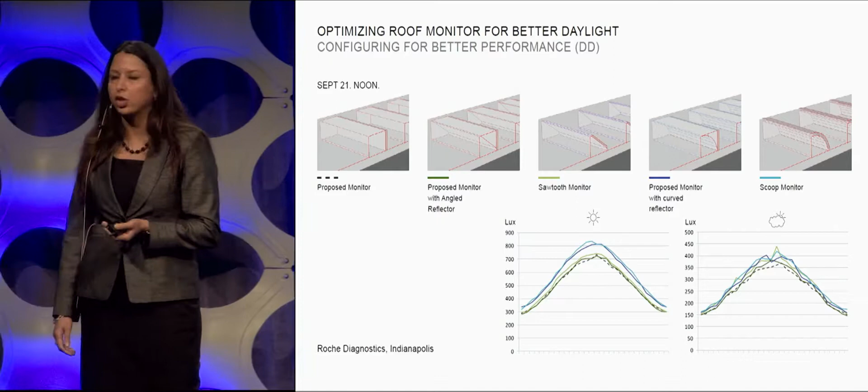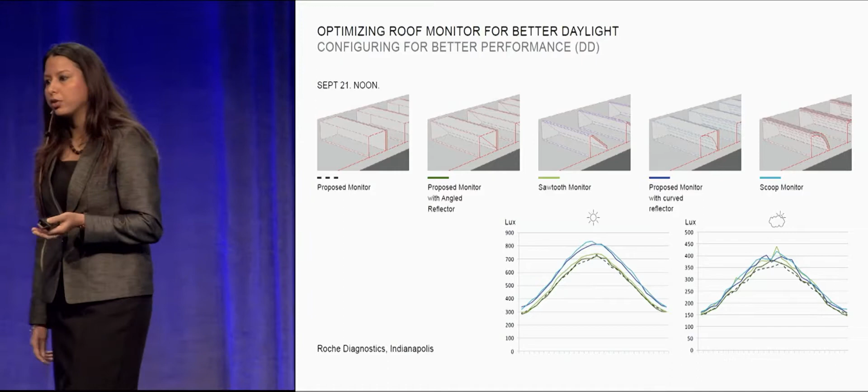We moved into DD and started fine-tuning what this roof monitor would be like. We started with rectilinear geometry, then thought we could make this better, and looked at a sawtooth monitor and a scoop monitor. Both options indicated higher levels of daylight in the space. In the end, the scoop monitor performed better than the sawtooth, but for cost reasons we proceeded with the sawtooth monitor, as well as because the visual aesthetics desired were more rectilinear in nature.

Along the way, we were also looking at daylight autonomy and useful daylight illuminance, which Shell touched on earlier, as an annual climate-based metric for the entire year. We also looked at it for specific space types.

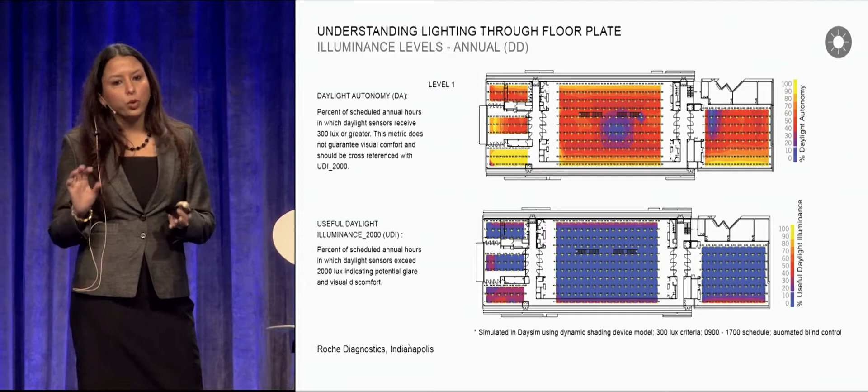I'm looking at my timer here, and time is running faster than I would like. So I'm going to go fast because I really want to share an interesting study that I have right after this.

This is a similar process we used to optimize the facade, similar to the skylight option. We were looking at different overhang depths, as well as louver options on the exterior of the facade.

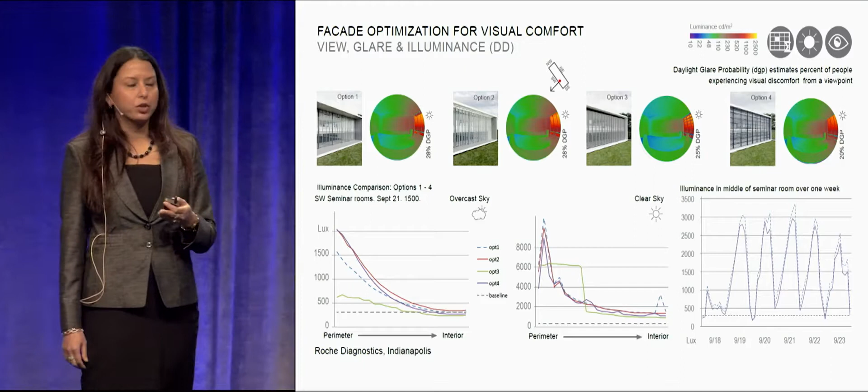The graph on the right really shows the interior perimeter, where daylight levels don't change much. But closer to the facade, when you see the two graphs on the left and the right, that's where you see the maximum variation and peaking in the daylight levels.

So this is something unique that we tried out. I don't know if anybody has looked into this before. A very interesting study. We always look at daylighting with respect to how an architectural element or device informs lighting quality within a space.

Do we have a light shelf? How would that impact it? What is the glazing? How is that going to impact the daylight? A roof monitor, building form—we never think about landscape. How would landscape really impact the daylight in this space?

It just so happened that the landscape architect, when doing his design, in coordination meetings said we want to put a row of honey locust trees adjacent to the facade, about 7 meters away from the facade. We thought, okay, that's going to impact the daylight.

So we wanted to test what is the ideal distance from the facade that the trees should be placed, but also what height. We had to make some assumptions about what height to allow the tree to grow. The honey locust tree is a deciduous tree, so it sheds its leaves in the winter.

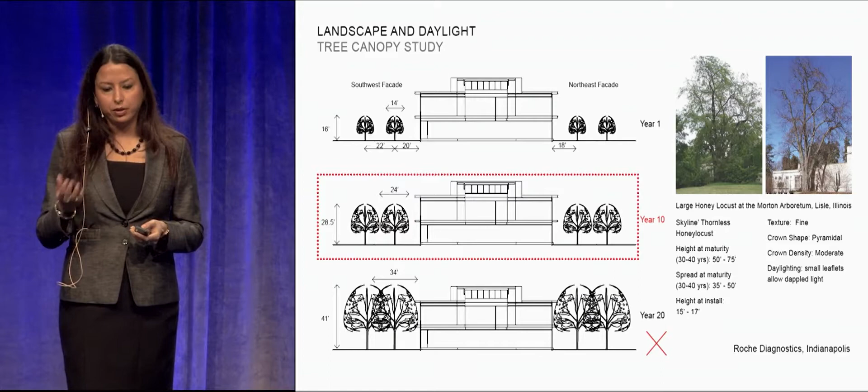It's got really fine leaves which allow dappled light to flow through it. So we had to also look at how we could really model this leaf geometry, or the properties of the leaf, to determine the quality of light in the space.

I had a really talented guy working with me at that time—got to give credit to him. Martin Brennan actually came up with a methodology to model this. He took the leaf structure, or tree structure, in Photoshop, mapped it into Illustrator, and then created a Rhino model, mapping it over a hemisphere to create this tree object.

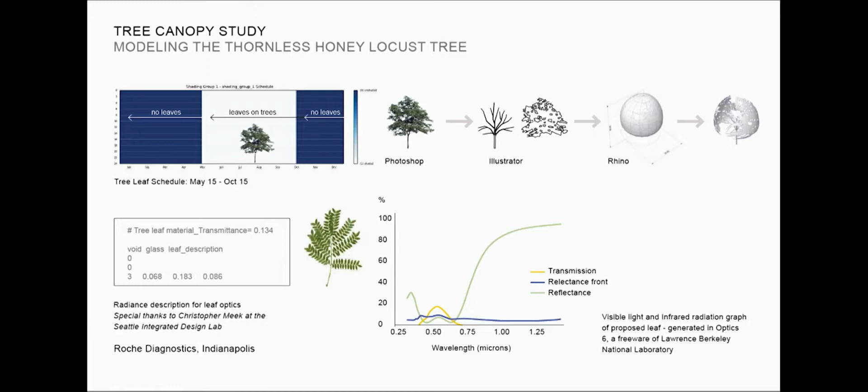DIVA has the ability to create shading profiles, generally applied to shades, where you can switch a certain shade device on and off. So this tree was really modeled like a shade device, where the leaves were turned off in the winter and came on in the summer.

We then tested the tree spacing for different daylight autonomy models, looking at different spacing types for the trees. As we moved from a 20-foot to a 30-foot tree spacing, the daylight autonomy within the space increased, but there was also an increase in a little glare. Moving further to a 40-foot span distance, the daylight autonomy increased more.

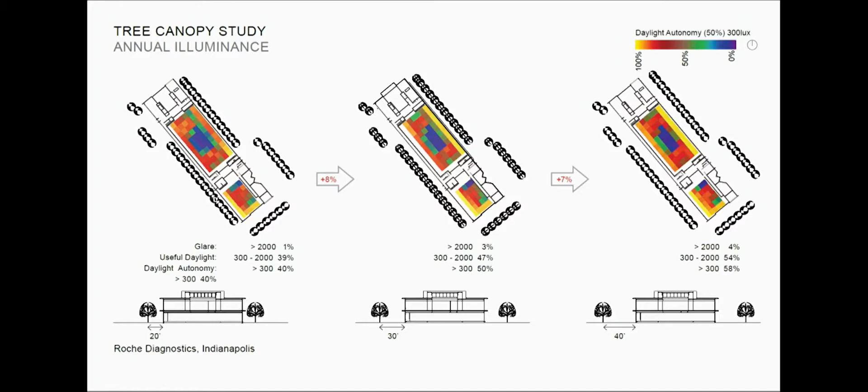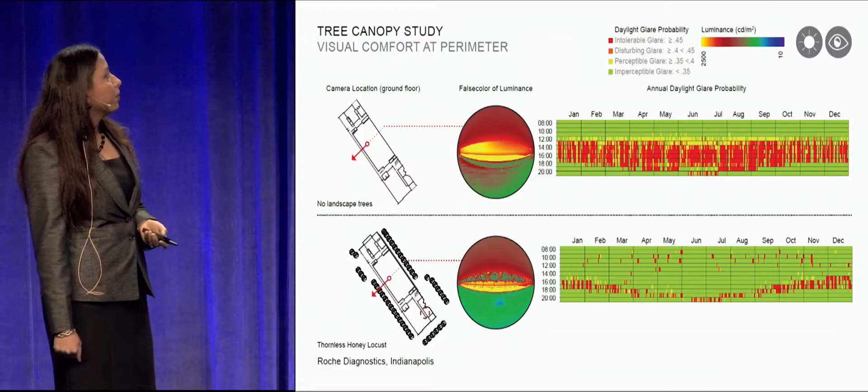What you see here is a visualization at a certain viewpoint - an annual glare probability done for an option without trees and with trees. The graph on top, the red, indicates the amount of glare you'd have within the space if there was no shading and no trees. In the second option, just by adding those trees close to the facade, we were really able to eliminate a lot of glare. So I want to end here with this little animation.

This is just an image you can see later at about 5 o'clock, where you do see that the luminance levels are much lower in the space. Thank you, and I'll open up for questions now for the entire team.